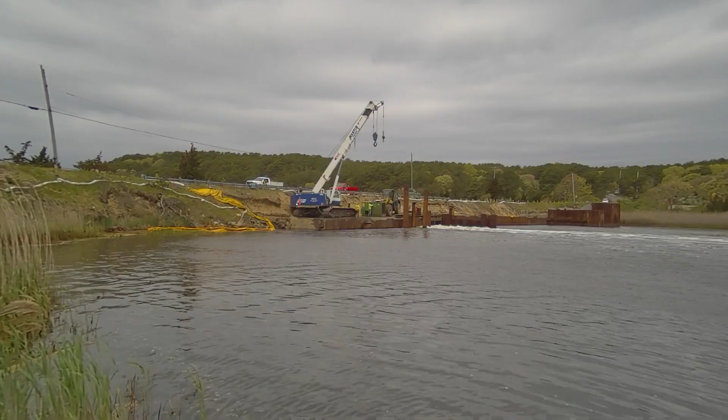Green salt marsh grass immersed in rippling water. Hi, I'm Brian Carlstrom, Superintendent at Cape Cod National Seashore, and behind me is a restoration effort that is just getting underway. Time-lapse video of bridge construction over the river. The Chequessett Neck Dike is in the process of transitioning to the Chequessett Neck Bridge. Black and white photos show the construction of the dike. There's been some type of a tidal impoundment here all the way back to 1909, and that's where the trouble started.

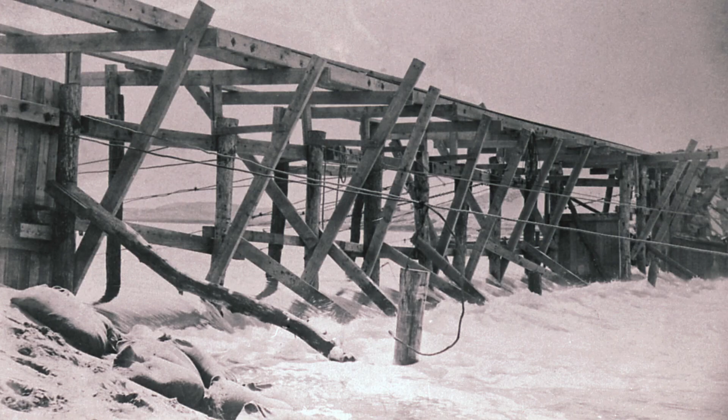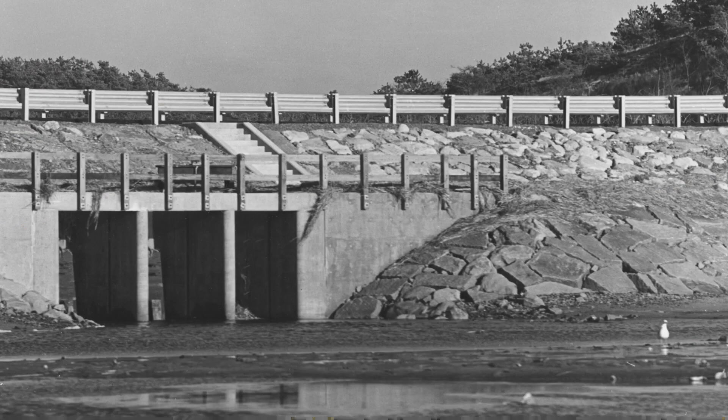Wes Stinson, project representative, Environmental Partners, stands on the edge of the partially constructed bridge. So the existing dike, which was built in the early 20th century, essentially is just an earthen dam across the Herring River. A series of black and white photos show the dike being built across the river mouth and the 3 box culverts. The existing culverts were roughly 7 feet by 7 feet. Box culverts, 3 of them in sequence.

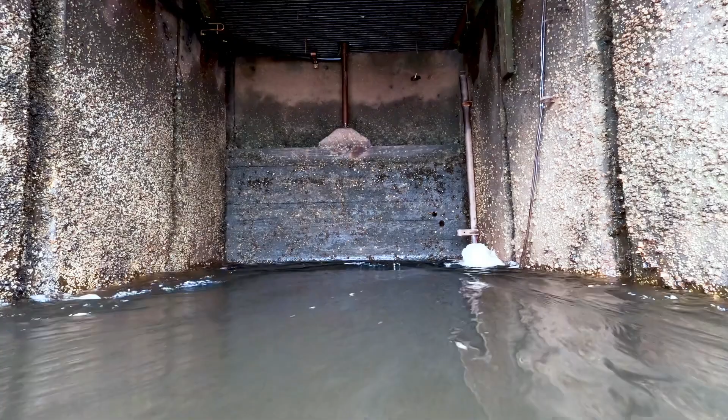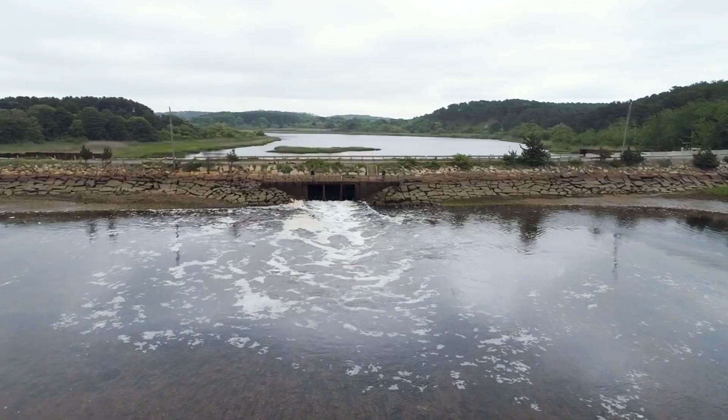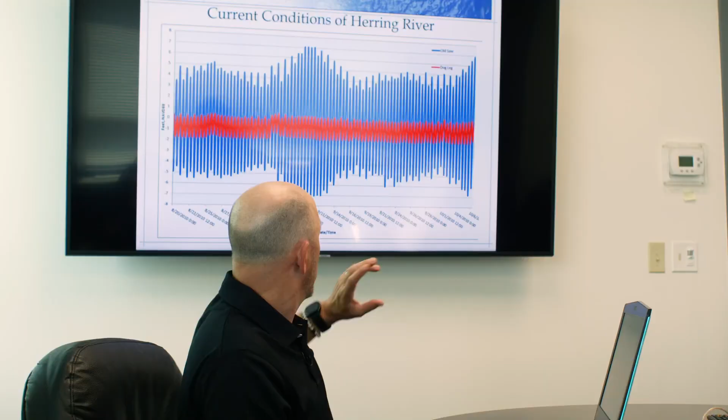Kirk Bosma, Senior Coastal Engineer and Innovation Director, Woods Hole Group, indicates a graph of wide blue tidal range and narrow red tidal range. Anywhere from 10 to 14 feet tide range down to 1 to 2 feet. High tide floods the marsh grass. The current dike basically mutes that to what that red line is. So you have a massive restriction of the exchange of the water. An aerial view of water flowing out of the dike. And then if you go further up in the system, that tidal exchange of 1 to 2 feet becomes almost zero. Still water in the river is surrounded by trees and shrubs.

The water quality is so poor coming out of this, it's actually been declared an impaired water quality resource by the state of Massachusetts under the Clean Water Act. Red water flows choked with algae. So that's why we're putting so much effort into this. An aerial view pulls back along the river and marsh grass.

So our design approach for the permanent bridge is really modeled, if you will, around the hydraulic requirements for the project. Nils Wiberg, Chief Water Resources Engineer, Fuss & O'Neill Incorporated. Nils gestures to indicate the placement of the bridge panels. So if you imagine this is the river bottom and this is the bridge deck, we allowed panels to be installed through the bridge deck, and some of the panels have gates attached to them. Nils points to a diagram of the bridge panels.

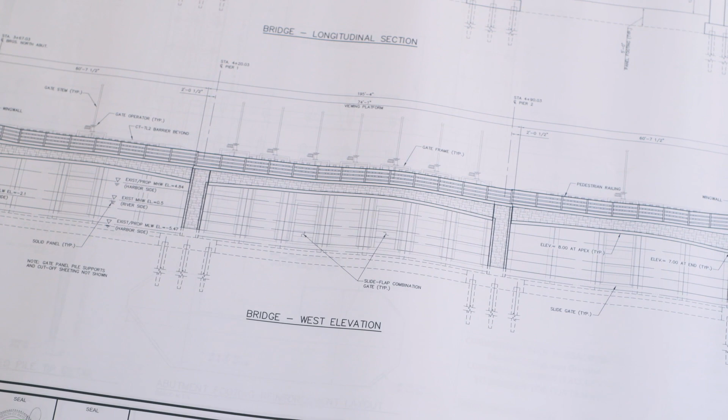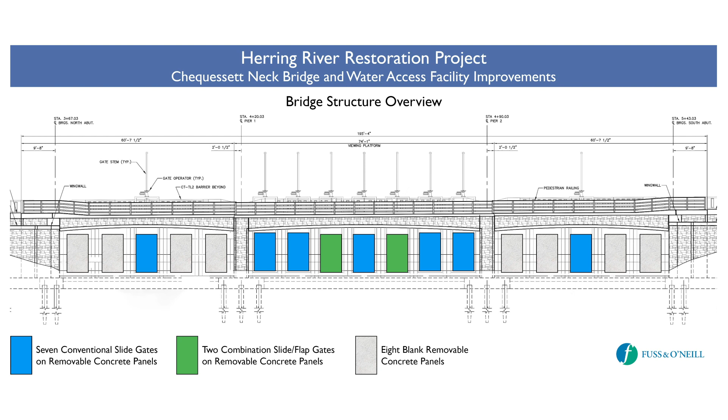We have 2 types of gates. Some of the gates are slide gates. In other words, they just slide up and down. A diagram illustrates the arrangement of gates and panels. And the other gate can slide up and down, but it can also flap out. So when the river wants to drain out into Cape Cod Bay, the flap will allow that greater volume of water to drain out. And then when the tide comes in, the flap closes and it restricts the incoming tide.

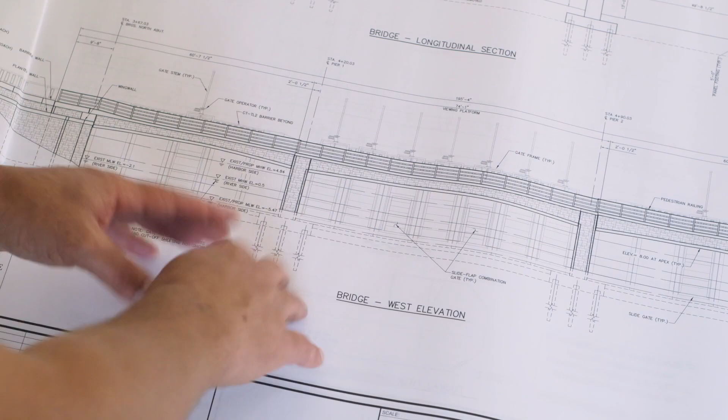And as we move through the restoration and these gates become incrementally more and more open, then the next point to increase the hydraulic opening further would be to remove panels. A design drawing of the bridge shows the closed panels transitioning to partially open gates and a fully open bridge.

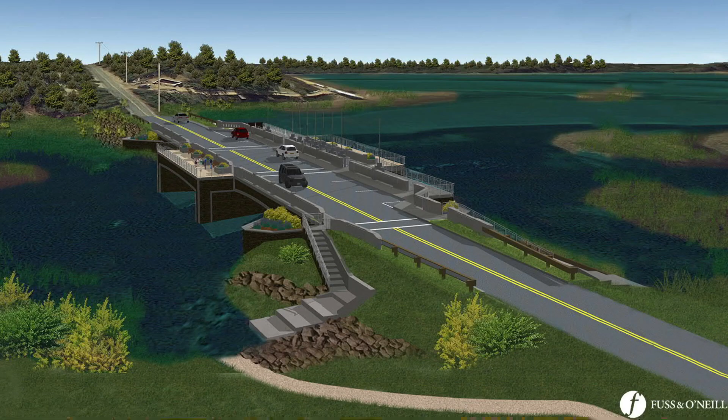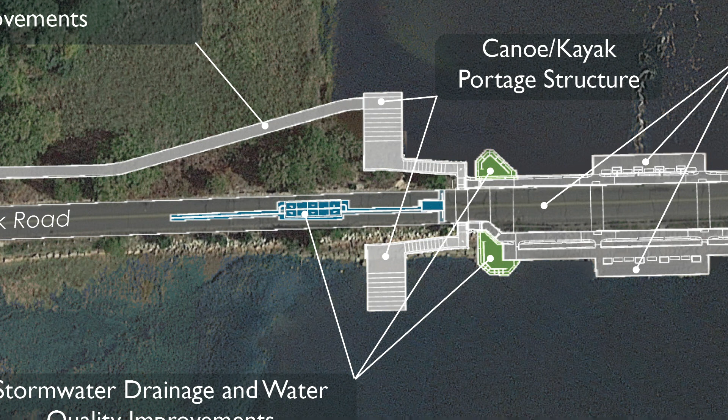There's also been a lot of community engagement in the process of design, particularly with respect to the bridge. Carol Ridley, Herring River Restoration Project Coordinator, Ridley and Associates. A design drawing shows platforms on either side of the bridge. Its overall design incorporates features that reflect community desires for additional enhanced access to the water. So we introduced some portage facilities that would allow kayakers or canoeists to take out on one side and put in on the other. A bird's eye view drawing shows ADA compliant access facilities and portage structures.

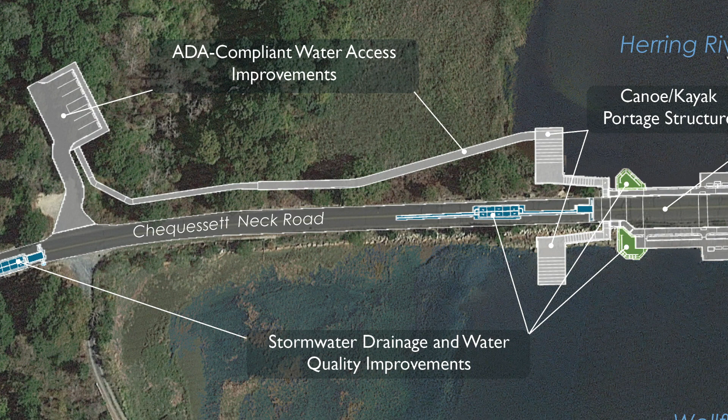And we also developed a public access facility that's ADA accessible from Chequessett Neck Road, going down on a little path down to the landing on the riverside. It's going to be a real asset to the community. An aerial shot tracks along the bridge under construction.

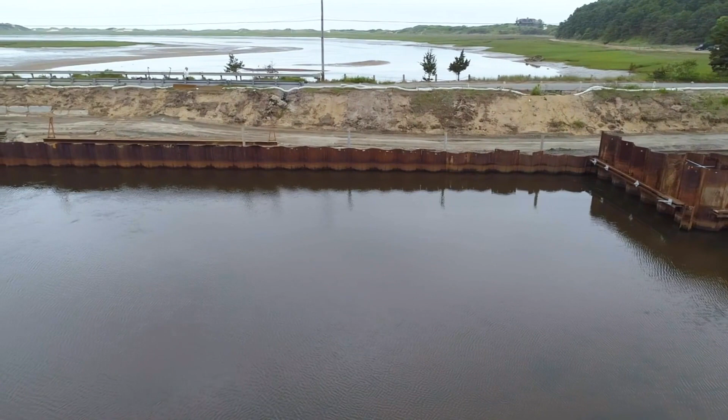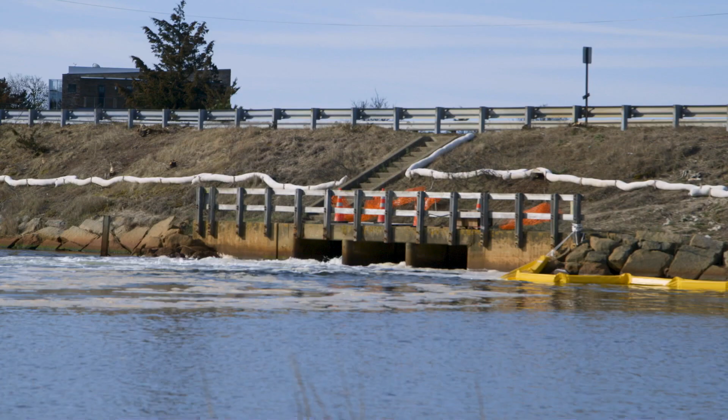Richard Waldo, town administrator, town of Wellfleet, sits in front of framed family photos. Not only does it open up recreational activities, not only does it improve rare species habitat, improve shellfish, one of our largest industries that we have, but it also fixes a failing infrastructure. Water flows through the dike into the river. So if this project did not move forward, if we didn't have funding from our federal and state partners, the town of Wellfleet would have been on the tab for rebuilding this infrastructure. An aerial view shows the dike and bridge under construction.

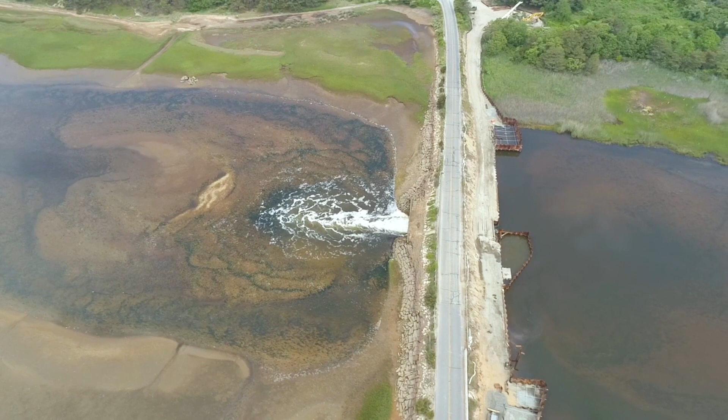We're hoping to learn from the mistakes of the past and really build something that's going to stand the test of time. Time-lapse video shows a crane placing pilings. It's a tough environment in the winter. We've got to make sure that whatever we build out there is going to be able to withstand the elements. A wide aerial view moves upstream from the river mouth.